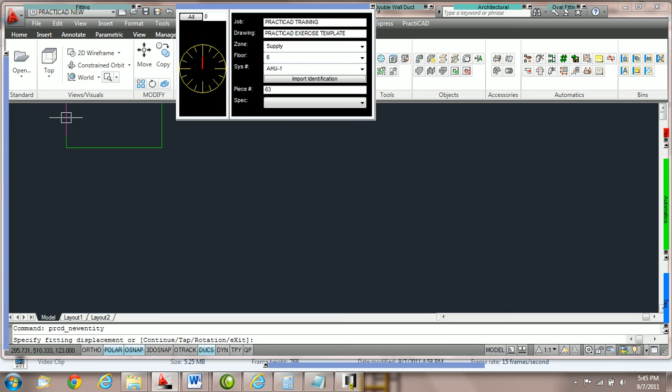Notice currently that spec has nothing selected. So what we're going to do is grab a fitting and go into the fitting parameter box, and you can see that it has no connections. This is a great indicator that there are no specifications in play. However, if we come over to the workbox, pull from our drop-down menu and say, let's use 2-inch water gauge, and obviously the choices will vary depending upon what your specifications are.

We're going to get the drop-down menu that's going to say, should we either A, apply new specs to new fittings, B, apply new specs to the entire drawing or edit the entire drawing at once, or apply new specs to current selection. That means whatever's currently selected, we can now edit the spec. To start off, we're going to choose apply new spec to new fittings and press OK.

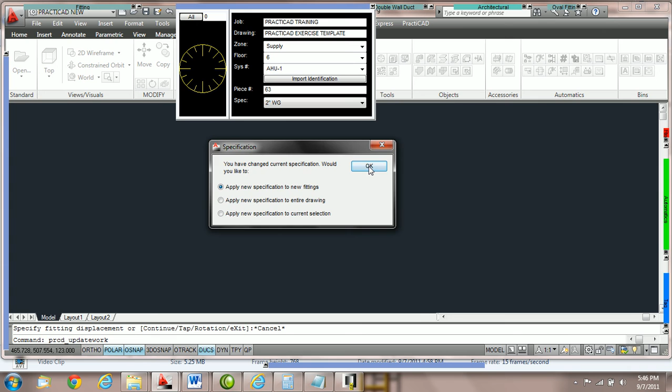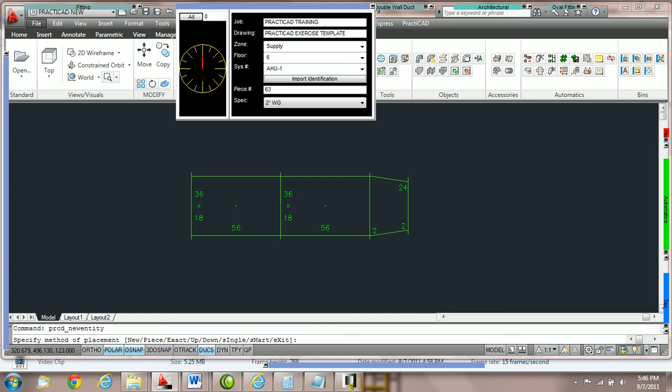Now when we go to grab a piece of duct, you can see instantly that the spec is working on the fitting. You can see that it's added the proper connections and locks and all of the other technology data. We're going to put a couple of fittings on the drawing. Here we'll just do 2 pieces of rectangular duct, a transition, and then 1 more piece of rectangular duct. You can see that the 2-inch water gauge is represented by tie rods and TDC or TDF flanges.

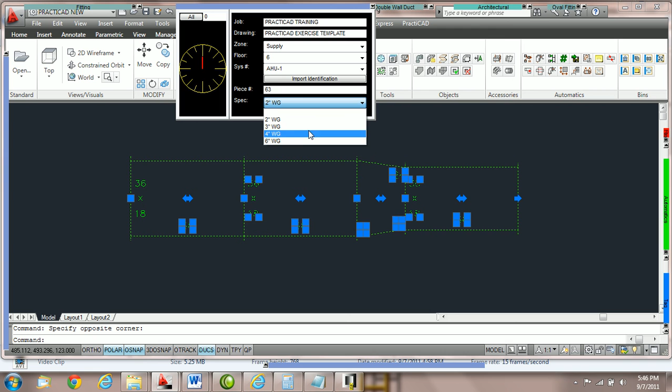Now if we're going to edit this, we could highlight this section or use a selection automatic, and there are separate tutorials on all of these selection automatics. And then we can just go to the workbox and say we would like to apply 6-inch water gauge to the currently selected duct. When I do that and I press OK, you'll see when we let go of these fittings that they no longer have tie rods because the spec has changed.

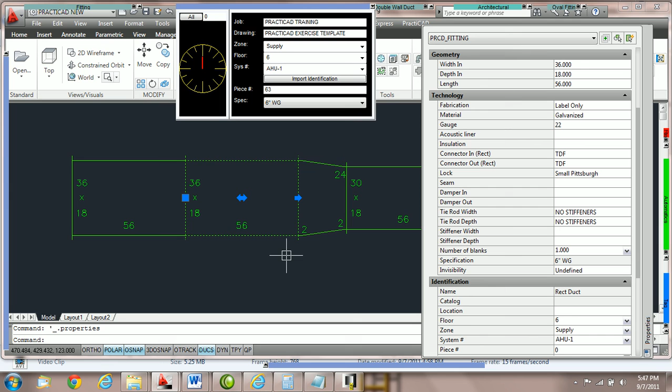You will also notice that if you double click on a fitting and go into the AutoCAD property box, underneath technology, we show the specification of the fitting itself so you can see it's been updated. Very important to always choose your specification first and then grab duct. That is the recommended procedure. That'll conclude our tutorials on the workbox.